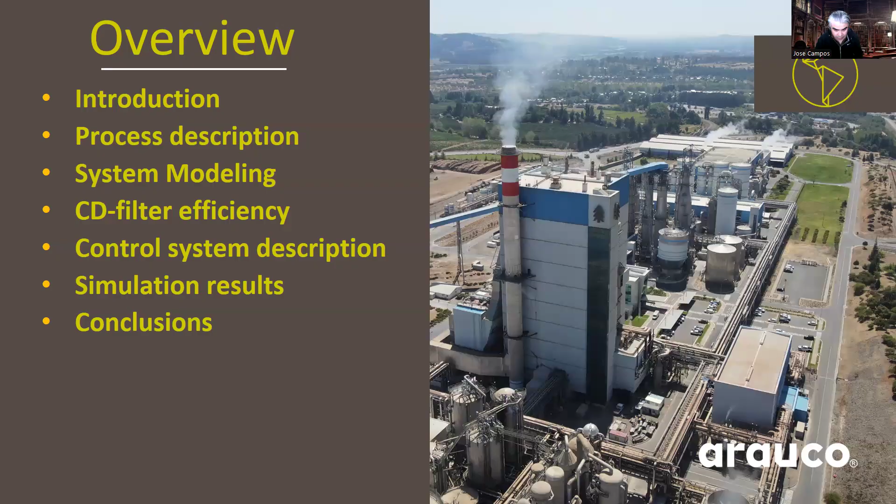This will lead us into the simulation results, comparing the performance of both controllers and highlighting key findings. Finally, we will end with conclusions which summarize the main contributions of this work. So let's get started.

Arauco is a vertically integrated global leader in sustainable forestry and forest products. Arauco lives here in Chile, basically. Its mission is to transform renewable forest resources into solutions for everyday life, while maintaining a strong commitment to environmental stewardship, innovation, and community development.

This company runs 7 mills in Chile and Argentina, producing approximately 4.5 million tons annually, ranging from market kraft to dissolving and fluff pulp. These mills supply global paper, dissolving, and specialty industries. Beyond pulp, Arauco is also one of the major producers of wood panels, around 8 million cubic meters per year, and is a significant generator of renewable energy, around 1,078 megawatts per year. This data reinforces its role as both an industrial and sustainability benchmark.

In 2024, this company operated globally across the Americas, Europe, and even Africa, with approximately 1.7 million hectares of forest assets and around 20,000 employees worldwide. The company produced almost 8 million cubic meters of wood panels, and 4.5 million tons of pulp, and generated approximately 1,078 megawatts of clean energy. This company also invests around 40 million in research and development, reinforcing its leadership in sustainability and competitiveness.

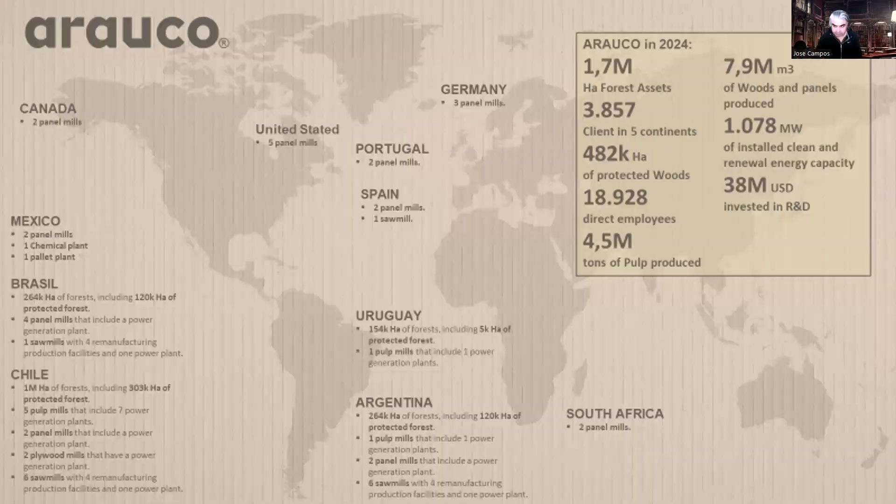Now, let's talk about the CD filters. CD filters are a key solid-liquid separation unit used in pulp mills, especially for pulp washing and white liquor clarifications. They consist of multiple porous discs rotating through a slurry under vacuum, forming and discharging cakes. The dynamics of cake thickness and dryness are directly influenced by rotational speed, vacuum level, and slurry concentration. These variables strongly determine throughput, filtrate clarity, and overall chemical recovery efficiency.

It is important to recognize that this machine remains underrepresented, in our view, in modeling and control research. Most existing work is empirical or steady-state, which fails to capture the nonlinear coupling between cake growth, filtrate flow, and mechanical dynamics. Even more, in practice, mills often rely on decentralized PI loops or even manual operator intervention, which are insufficient to handle multi-variable interaction and process constraints.

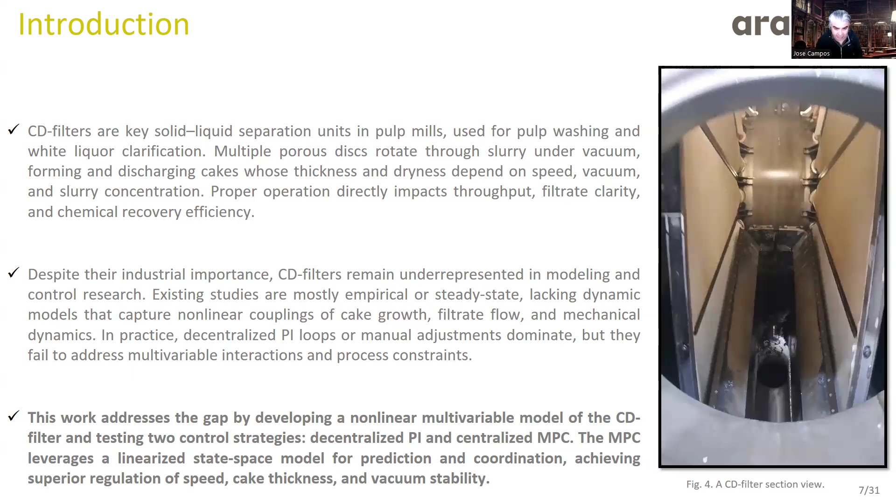Now, let's move on to the process description of this machine. Here we will look at how the raw white liquor, vacuum, and cake formation interact inside this machine, and how these variables define the overall dynamics.

This slide introduces the process description of these CD filters, used basically in this kind of mill. This filter consists of multiple porous discs rotating through a slurry under vacuum, allowing the formation and removal of the fiber cake on their surfaces.

As you can see, three main streams are involved. The raw white liquor, which is related to these variables. Then another output stream, the filtered white liquor, labeled QF and CS, and a third stream representing the mud flow, which removes the cakes, represented by this concentration and this flow.

For modeling purposes, instead of using the full 15-disc industrial unit found in the market, this system was reduced to just one single equivalent disc, which captures the averaged dynamic while simplifying the analysis.

The system dynamics are described basically by 5 key coupling variables, and that was our method to describe this system: angular velocity, vacuum pressure, slurry concentration, cake thickness, and the filtrate flow or filtered white liquor.

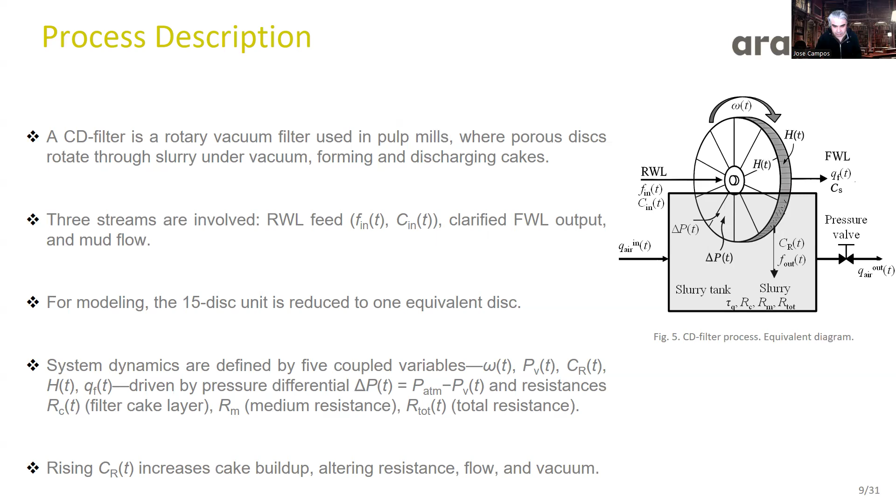Now let's move on to the system modeling. At this stage, the focus shifts from describing the physical process to developing a mathematical representation of this machine.

As you may know, CD filters exhibit inherently nonlinear dynamics due to the tight coupling between mechanical rotation, vacuum-driven filtration, solid transport, and cake formation.

To mathematically capture this interaction, we built a multivariable model based on 5 key state variables: shaft angular speed, vacuum pressure, slurry concentration in the vat, cake thickness on the disc surface, and finally the filtrate flow rate.

To ensure some tractability, simplifying assumptions are made. For instance, incompressible cake, a single disc equivalent capturing the averaged behavior of the system, continuous solid removal, constant filtration area, and omission of vat-level control.

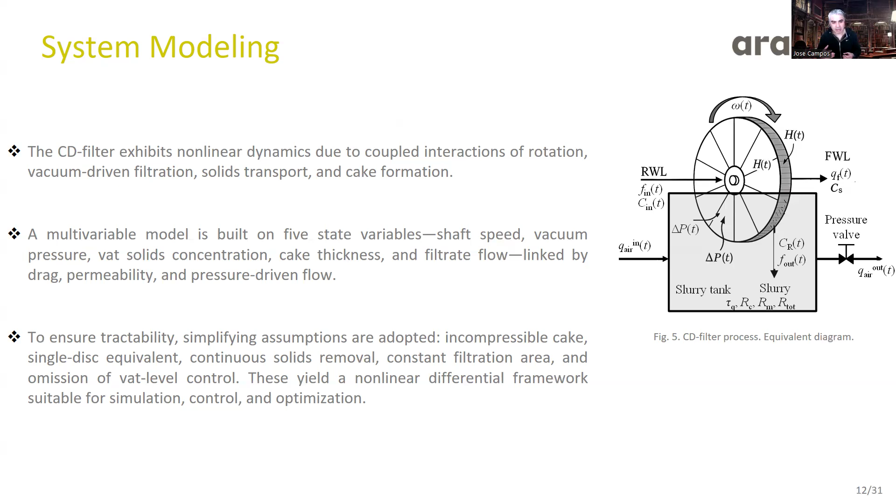Now let me move into each dynamical equation which forms this system. Rotational speed dynamic: this slide presents the rotational speed dynamic of the CD filter, governed by a torque balance, with the motor torque here and the resistance torque here.

This torque comes from hydrodynamic drag, friction, and mechanical losses, as you can see here. So the first equation representing this dynamic is the one I'm showing now, where J is the total inertia, as you can guess.

We could also find a linear relation to represent the resistive torque, modeled using this equation that I'm showing here, where KD is a viscous damping coefficient, and KC is the resistance coefficient.

Now it's interesting because, for instance, KD represents viscous damping from the slurry flow, and KC accounts for cake resistance due to the scraping while the system is working.

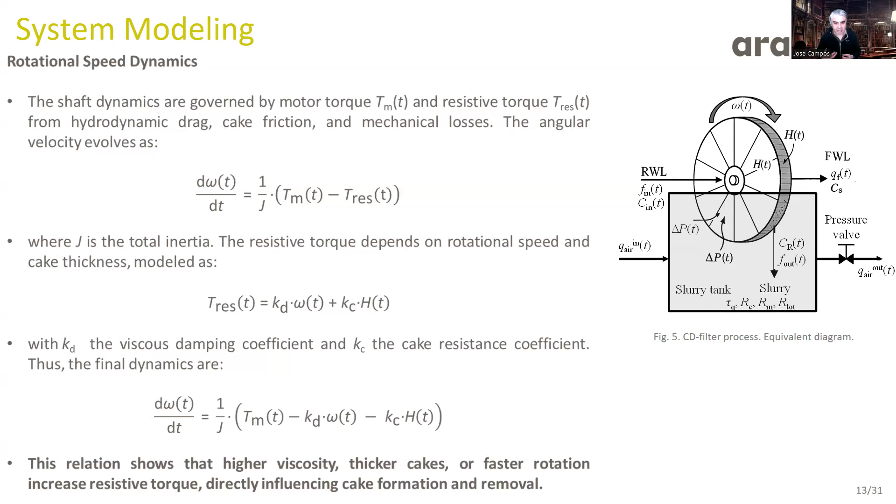Now let me go to the next dynamical equation, which represents the vacuum pressure dynamics. This slide explains the role of vacuum pressure PV in the main driving force of filtration, governed by a gas balance in the receiver. The receiver is another piece of equipment, not shown in this process description diagram, placed far away from the output stream of the system. RG is the gas constant, T is the absolute temperature, and VG is the receiver volume.

It's important to recognize that inflow, represented by q air in, rises with cake permeability, while at the same time weakening the vacuum. Outflow, q air out, depends on valve performance strengthening it. Analyzing this equation, we find that once maximum permeability is reached, further vacuum deepening yields diminishing returns in liquid extraction.

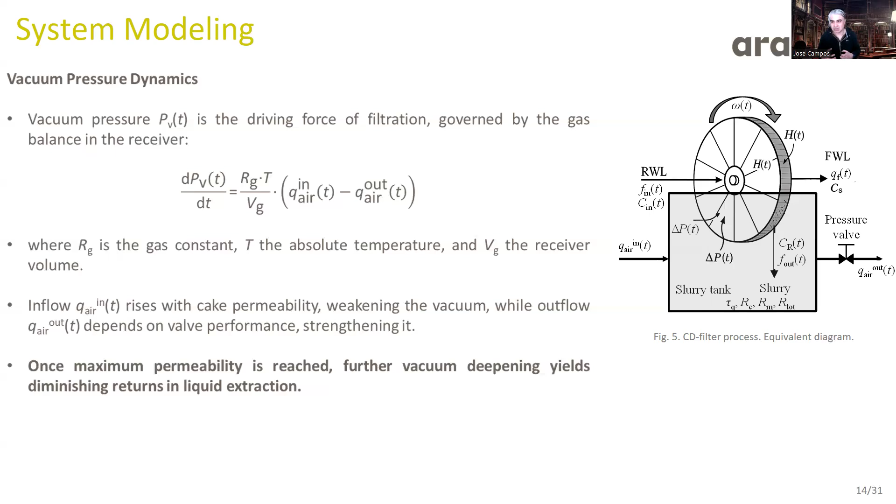Now let me go to the next dynamic equation, which represents the slurry solid concentration dynamics. In this part, we focus on the evolution of the slurry vat solid concentration, denoted as CR, which is governed by a mass balance over the vat volume. So this is a mass balance, basically.

Mathematically, we describe it as a net inflow of solid through the raw white liquor feed, represented by this first member of this equation here, minus, of course, the solid removed with the overflow, represented by this part of the equation here.

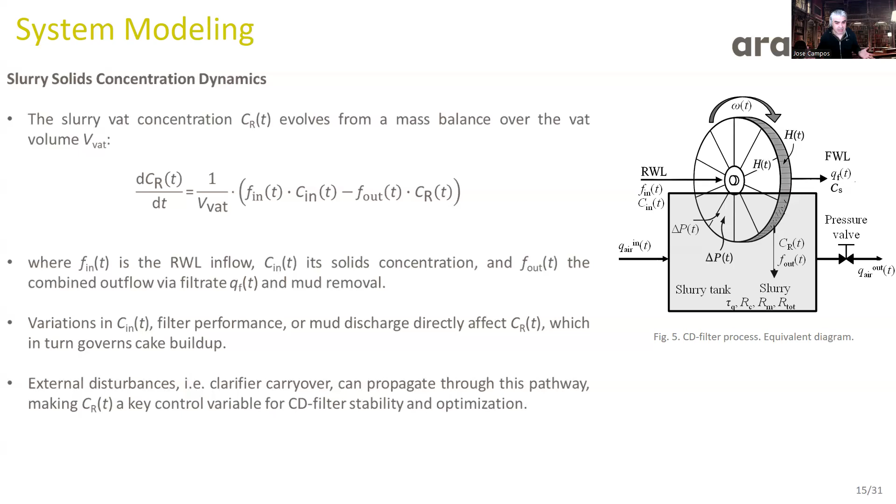Now, it's important to know that the outflow term captures both filtrate flow and mud removal, making this concentration highly sensitive to upstream feed composition, filter efficiency, and discharge performance. So disturbances such as, for instance, clarifier carryover can propagate through this pathway, making this concentration a key control variable for CD filter stability and optimization.

Now let me go to this dynamic equation, which represents the cake dynamics. Basically, here we focus on the cake thickness dynamic of this machine. The state variable here, HT, represents the cake thickness and evolves from the balance of deposition and removal, as you can see here in this equation.

Now, this governing equation shows that the deposition is proportional to the slurry solid concentration and also the filtrate flow QF in both terms, while removal is proportional to the rotational speed, as you can see here, and the existing cake thickness.

Also, important here is that operationally, this speed is tuned to maintain the target cake thickness, ensuring proper dewatering without excessive buildup of the cake.

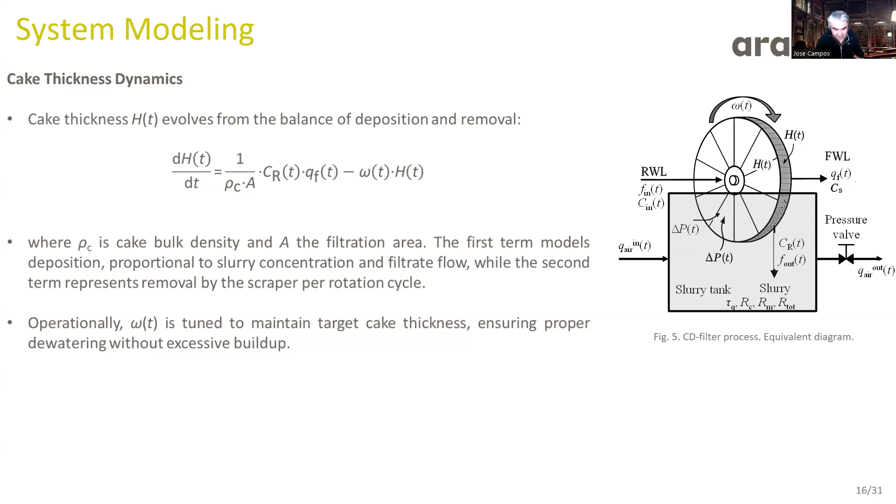Now, let me go to the final dynamic equation, which represents the filtered white liquor flow dynamics. This flow is governed basically by Darcy's law, where the pressure differential across the cake and medium drives liquid transport as the main driving force for this dynamic.

Mathematically, this dynamic is represented by this equation. It is important that the cake resistance RC, which I mentioned before, depends on the thickness, medium resistance RM, and at the same time, RM is more or less constant. So sudden cake discharge lowers RC and raises QF, while increasing vacuum strengthens delta P and boosts the flow.

So this last equation couples fluid transport with cake growth, completing all nonlinear dynamical equations.

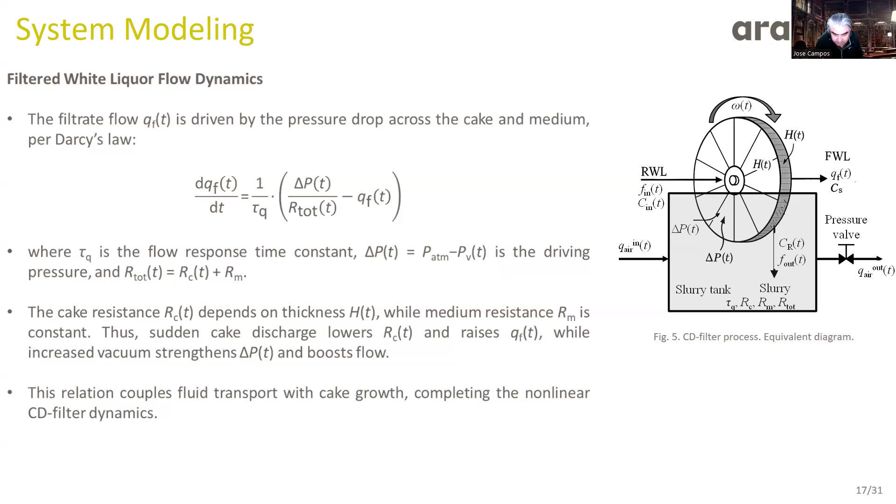Having said that, now let me show the steady state model. Why? Because we just use a classical control design, which is easier for us to get some linear model. So the step before that is to get the steady state operation point.

Now, this slide shows the steady state model of this machine. To build this, we just set all the time derivatives from the nonlinear dynamic equations to zero, which allows us to derive all the algebraic constraints, for instance, torque balance, vacuum equilibrium, solid continuity, cake build-up, and filtrate flow. Once we solve this algebraic system of equations, we can get our desired operational point of the system, represented in these equations here.

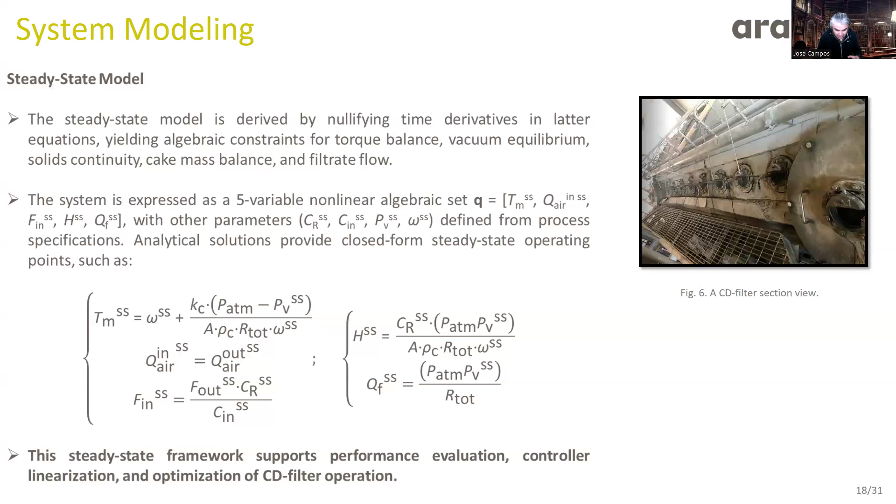So, having this, we are able to get our final linear equation using a first-order Taylor expansion, yielding a continuous time state space model, a linear model in deviation variables. So with this equation, we can just make the synthesis for control. But before that, let me show our ratio, what we found as the CD filter efficiency.

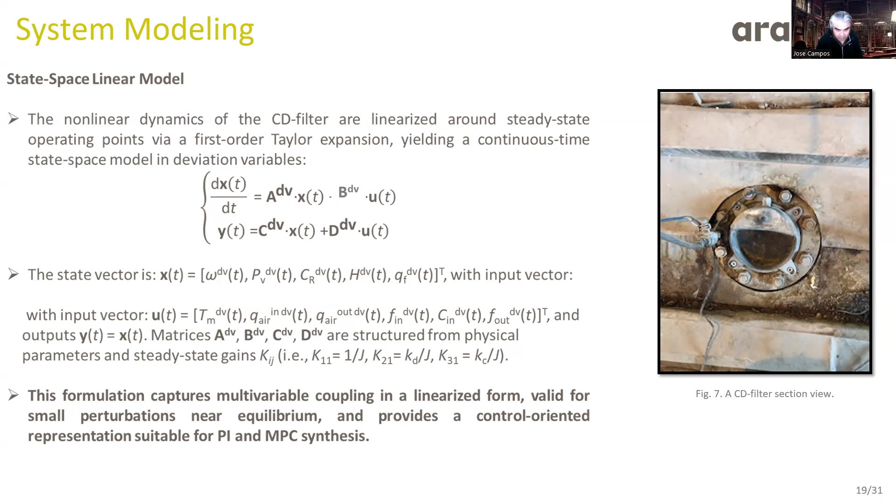Here, this slide explains how we quantify CD filter efficiency, basically. Efficiency measures the fraction of solid retained compared to solid entering into the system, as shown in this equation here. Essentially, it tells us how well the filter is separating solid from the slurry.

Of course, in order to get this ratio, we assume, for instance, a perfectly mixed vat, meaning that all the solid incoming suspensions are equally likely to contribute to cake formation, basically, with no bypass. Now, the evolution of the efficiency reflects that the combining effects of vacuum level, rotational speed, and slurry concentration are working together.

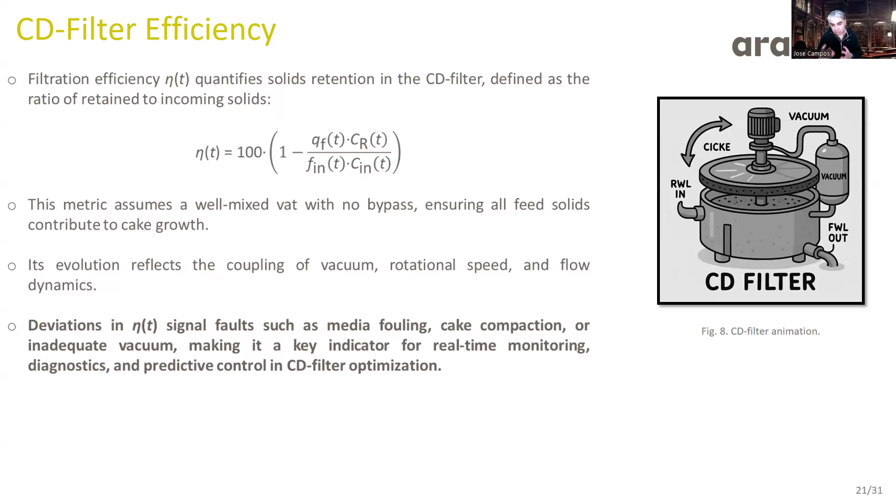So, deviation in this efficiency signal fault, such as media fouling, cake compaction, or inadequate vacuum, is also a key indicator in our point of view for real-time monitoring, diagnostic, and predictive control for CD filter tasks in the future. But you should know this equation we just implemented in our mirror DCS system. Now this equation is in a test-in-loop, basically to get some results in order to validate it and use it for control, not just for monitoring as at this time.

Okay, up to this point we have reviewed the nonlinear dynamics of this machine. Now let me introduce the control strategy implemented to achieve high-performance closed-loop regulation.

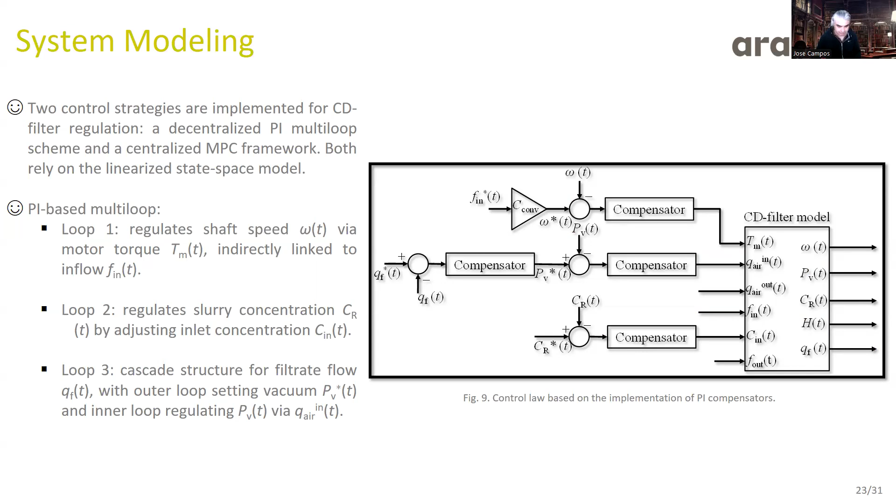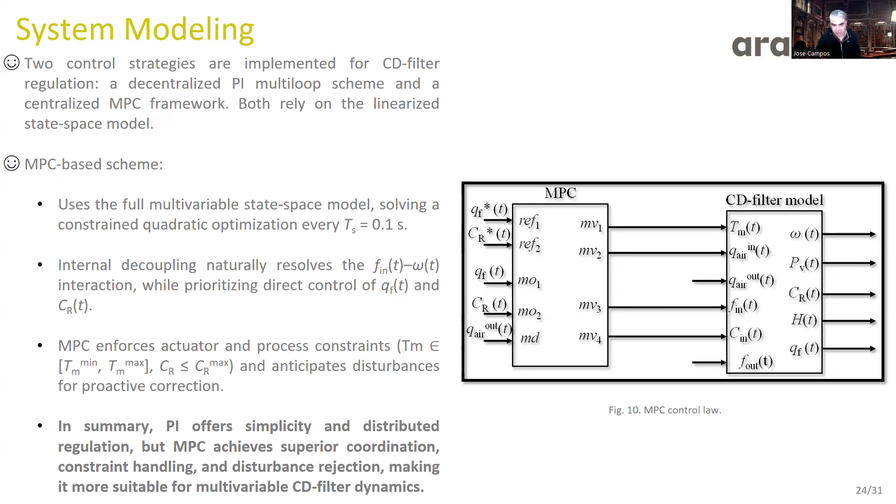The MPC is just a block where we finally control the QF, or output filtered white liquid, and the concentration. In this block it wasn't necessary to develop an inner loop to regulate the omega or rotation speed; it was just necessary to regulate these variables directly. The other ones act as a measured output, basically, as you can see here.

So now let me move into the simulation results. Basically, this figure presents the closed loop simulation result for slurry concentration under both control strategies. On the left side, we see the transient tracking response: the PI control exhibits a fast initial action, but with some excessive oscillation at the first time.

A large overshoot of around 52%, with an integral square error of approximately 2 times 10 to the power of 4, confirming poor damping, if you put it that way.

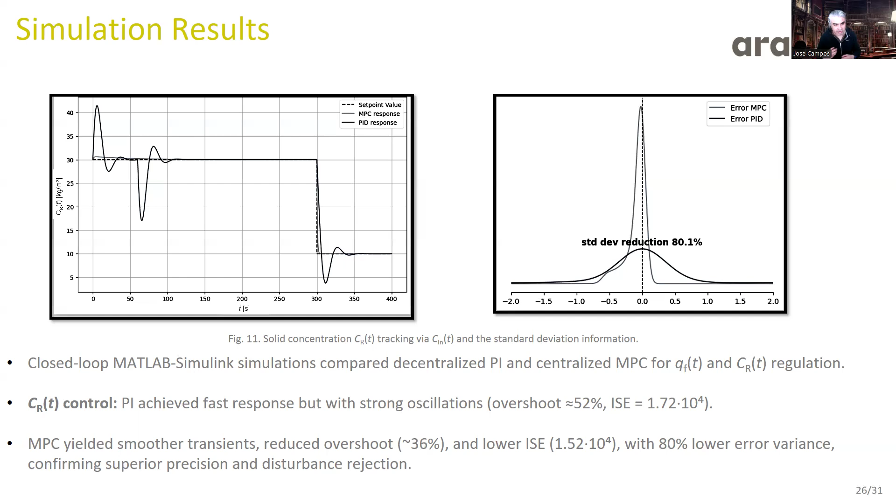In contrast, the MPC achieves smoother dynamics with a reduced overshoot of approximately 36% and a much lower ISE of 1.52. So MPC yielded a smaller transient, reduced overshoot and lower ISE, but also an 80% lower error variance, as you can see on the right side of this slide, confirming superior precision and disturbance rejection.

In this slide, we compare the regulation of filtered white liquid flow, QF, under both controllers. The PI loop delivers acceptable tracking, but presents approximately 2% overshoot, a settle time of 4 seconds, and an ISE with values that are really low.

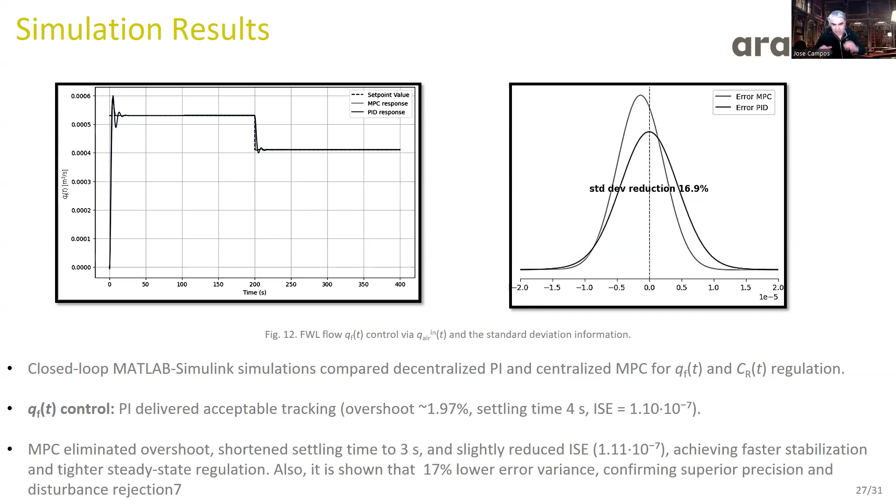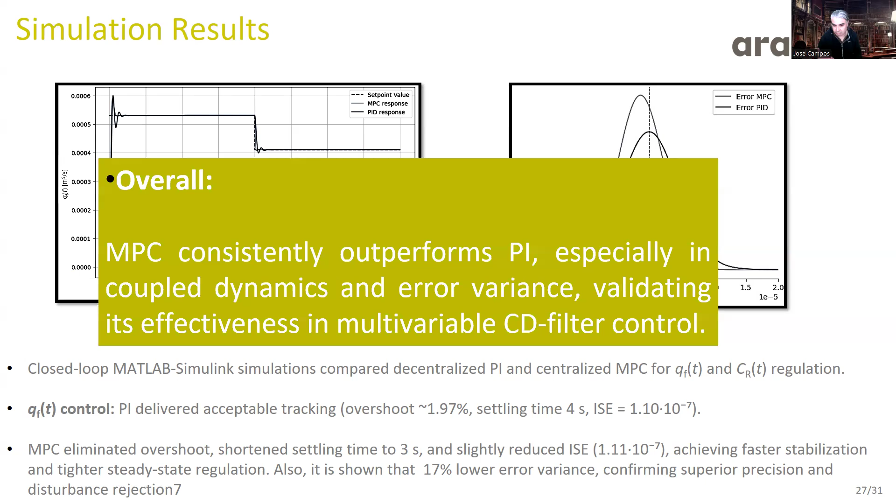By contrast, MPC completely eliminates overshoot, as you can see here, reducing the settle time to 3 seconds and maintaining a comparable ISE. So MPC consistently outperforms PI, especially in coupled dynamics and error variance, proving its effectiveness in multivariable filter control, and other stuff like the rates shown before.

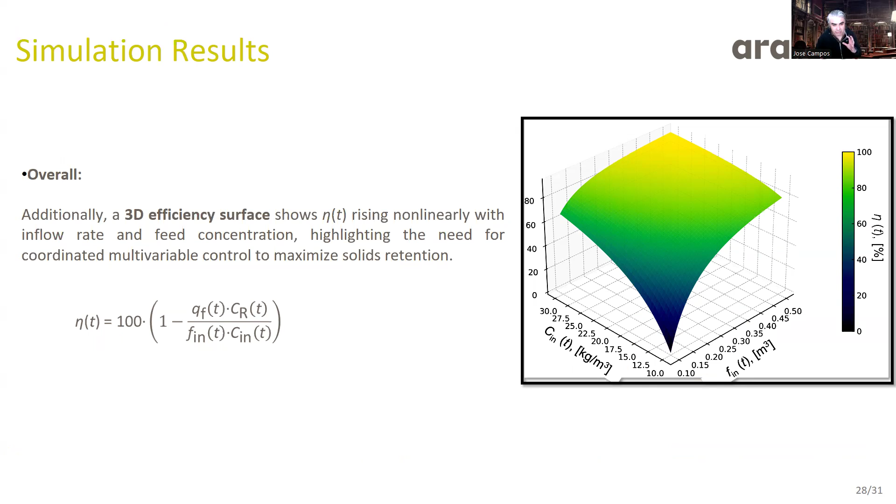Also, here we have a final simulation analysis of the CD filter efficiency. A 3D efficiency surface shows that efficiency rises non-linearly with the inflow rate and feed concentration, represented by this equation here, highlighting the need for coordinated multivariable control to maximize solid retention, as we found.

In order to end, let me tell you our conclusions. This work presents a nonlinear dynamic model of this CD filter, simplified to a single disk equivalent for tractable control synthesis. The model captured the couplings between rotation, vacuum, slurry concentration, cake growth, and filtrate flow.

Comparative simulation showed that MPC outperforms PI by reducing ISE, overshoot, and settle time, especially in coupled variables such as vacuum and slurry concentration. Error analysis confirmed MPC's higher precision and lower variance. The efficiency surface highlighted the need to coordinate control of feed flow and concentration. Overall, MPC proved superior traceability, robustness, and efficiency, making it a strong candidate for industrial CD filter optimization.